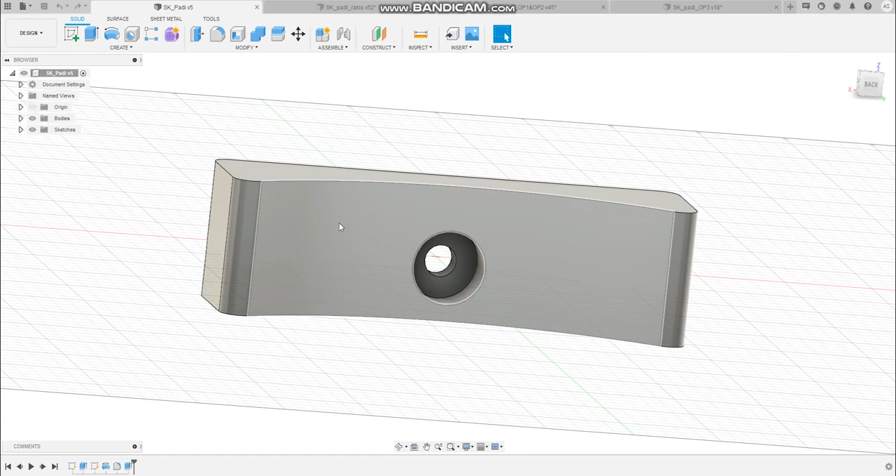In this video we will have a look how to create a program for CNC machining. First we will create machining program for fixture plate and then for the part itself. The part is this dumbbell base, made out of plastic.

The features that we need to machine are pockets and holes, and these holes must be tapped.

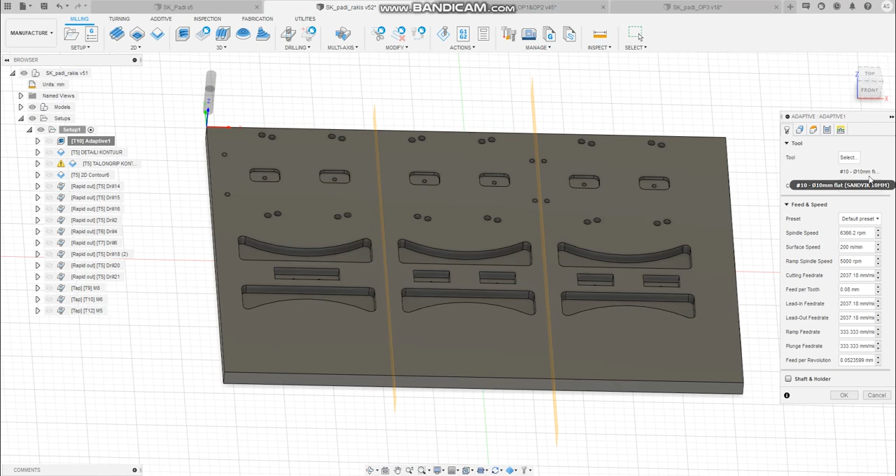First operation is pocket adaptive clearing. We use 3D adaptive clearing command for this, with a Sandvik 10 mm flat end mill. The geometry is pocket bottom. For optimal load we have 14%, which is 1.4 millimeters, and we use half a millimeter of stock in radial direction.

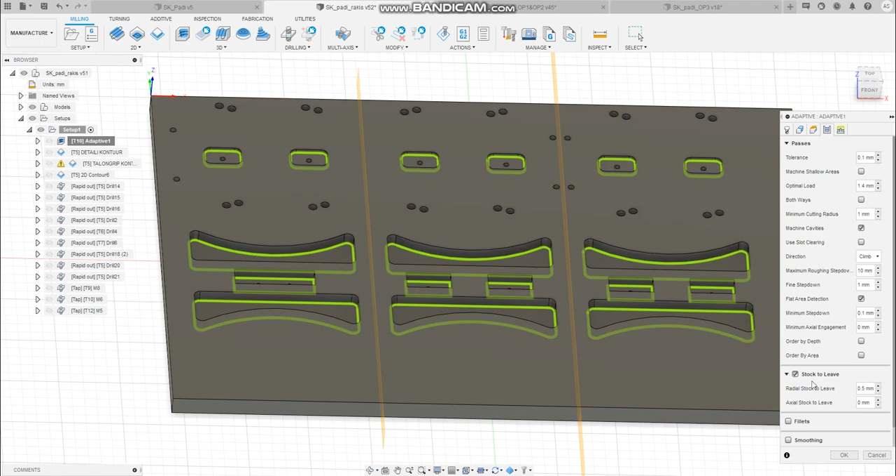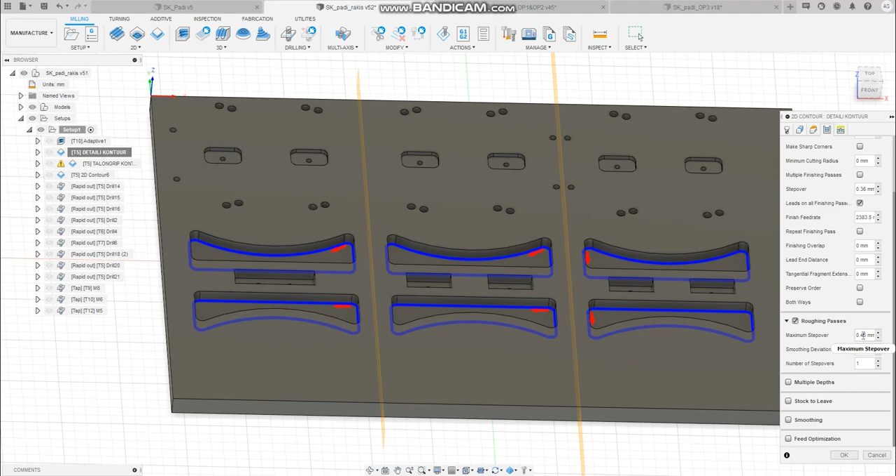Next we clean the detail pocket contour, using a Walter 6 mm flat end mill, selecting the bottom contours for this purpose. Here we have roughing passes made, so maximum step over is 0.45 millimeters. The reason is that during roughing process the 10 mm Sandvik tool leaves quite much material in these corners, and for the 6 mm tool this is a bit too much, so we use two passes to remove it.

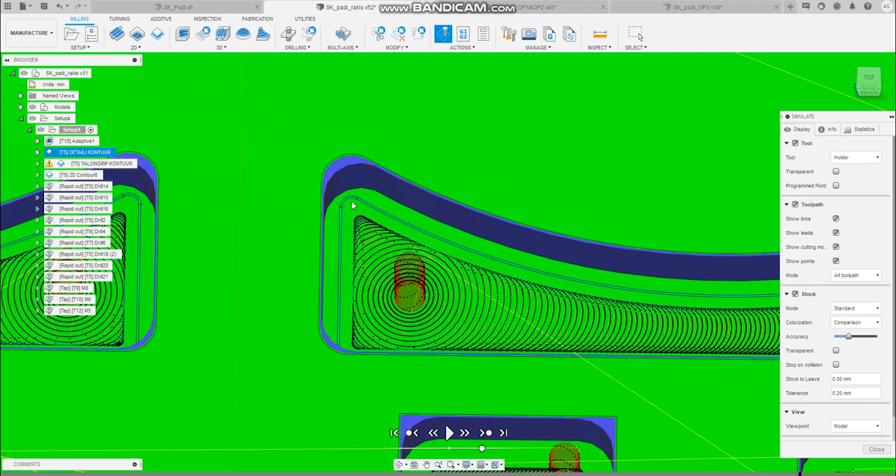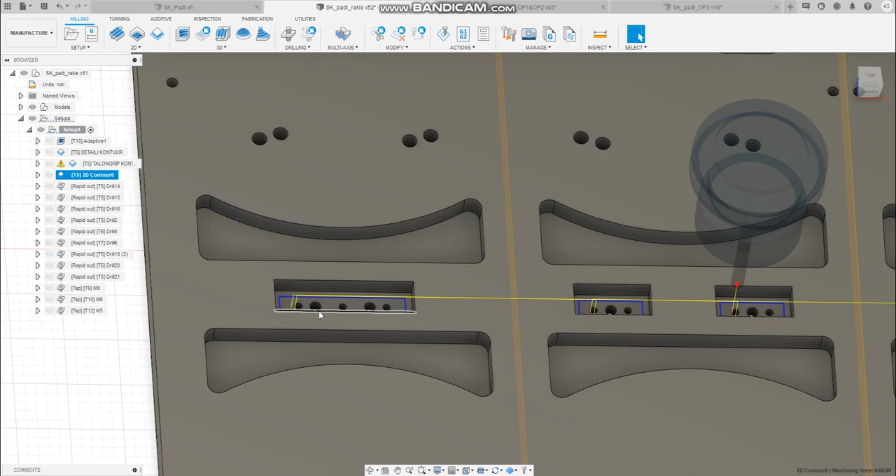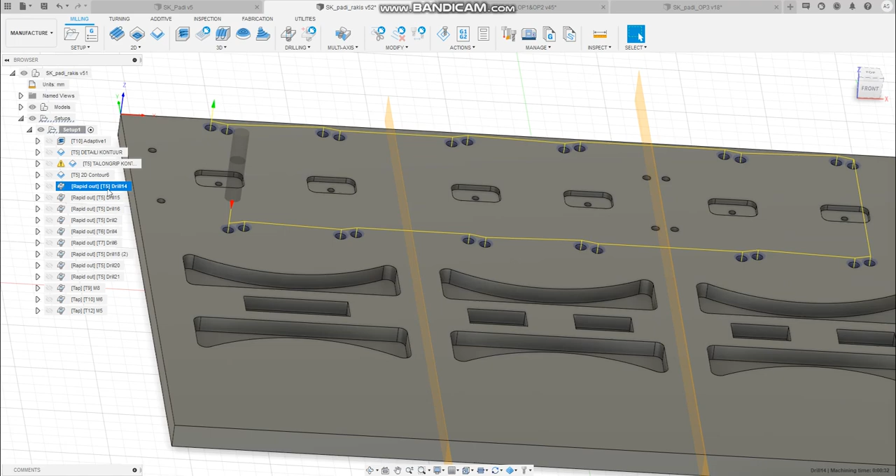Next we make a cleaning pass for our Talon Grip clamp pockets, and lastly for our Uniforce clamp pockets. Next we will drill all the pilot holes. For each diameter of holes we have our own path, because the depth of the drill is different.

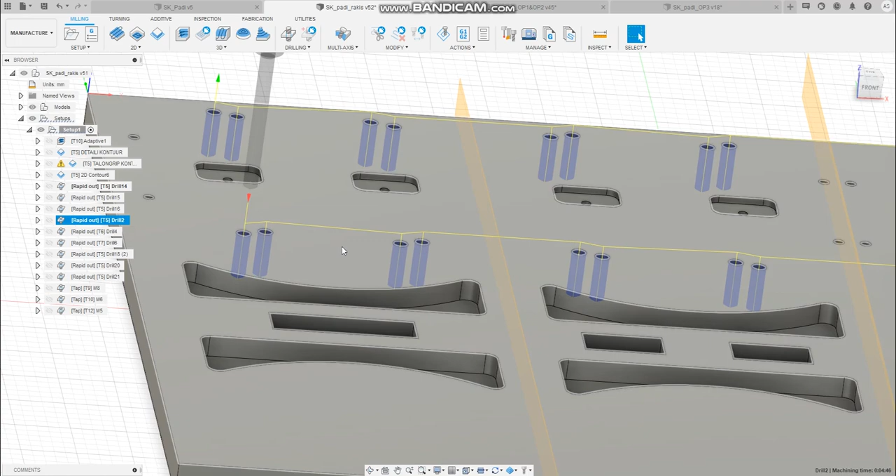For this we use a 10 mm spot drill with a tip angle of 90 degrees. After spot drilling we use the drilling command. We drill all of the holes and the drill goes through the material 5 millimeters, using high-speed steel drills.

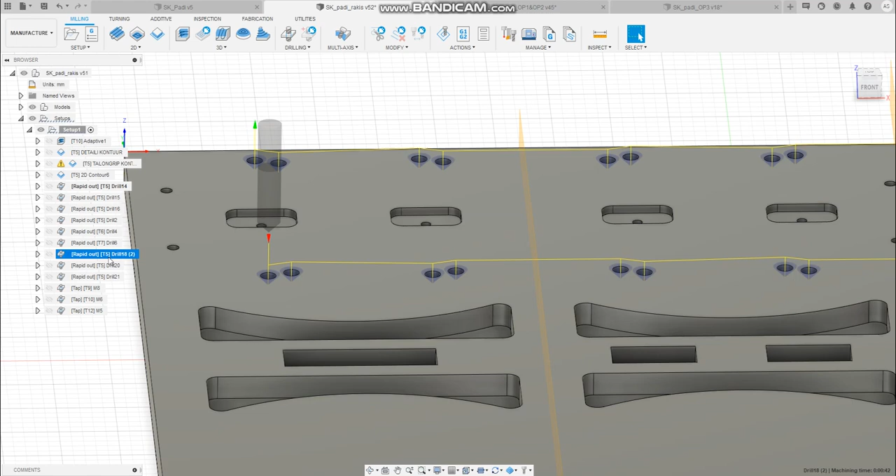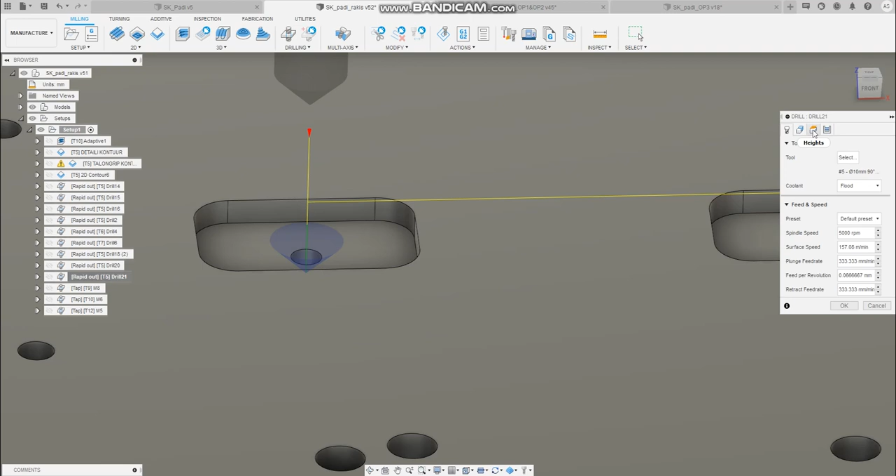Next we chamfer all the holes, and for each set of holes we use our own toolpath, because the chamfer is made using the drilling command. So if you want the chamfer diameter to be 5 millimeters, the tip must go through the hole 2.5 millimeters.

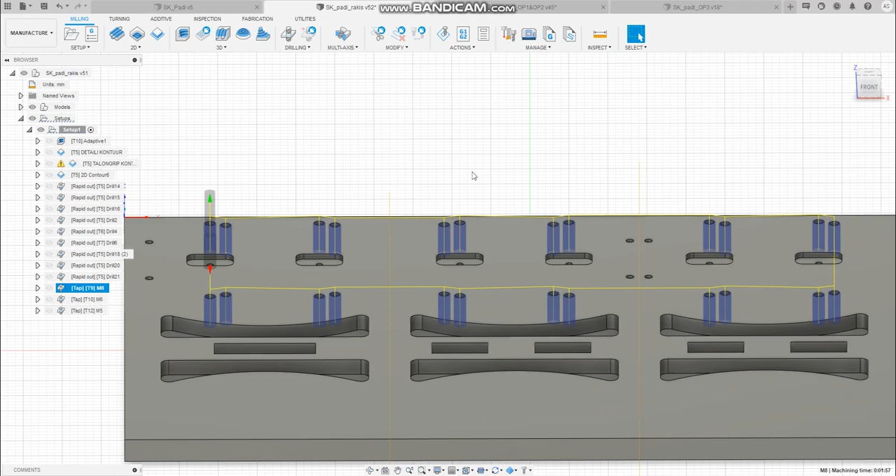And the last is the tapping command. The tap goes through the bottom also 5 millimeters, and during the machining process we have to use cutting fluid with taps. Now the program for fixture machining is ready.

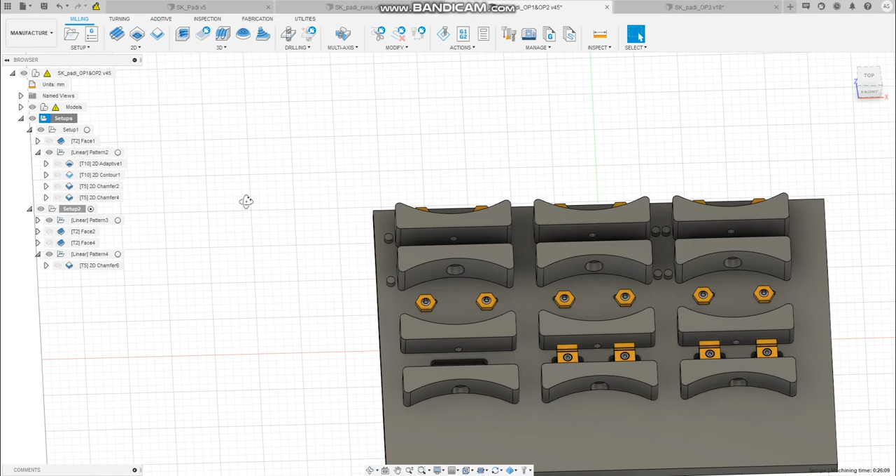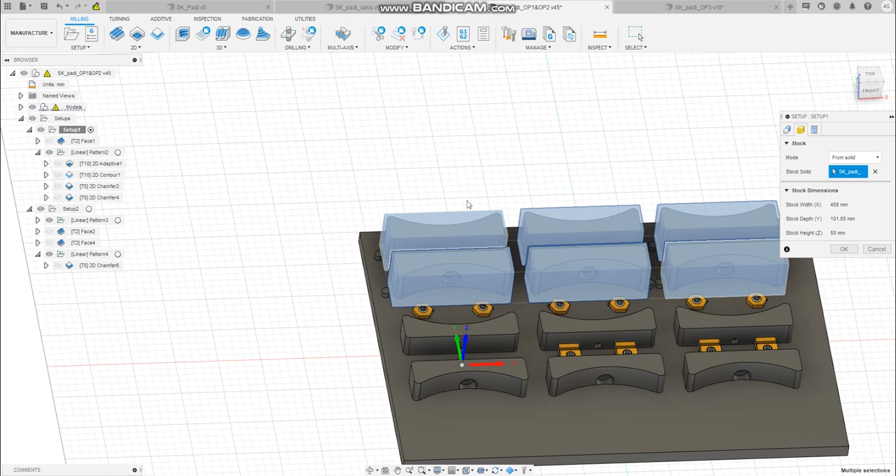Now we will look how to create a program for part machining. Here we can create machining for part first and second setup. The first setup is defined as follows: we have defined 6 bodies, 24 fixture bodies, and our stocks, which are selected from the solid models. The work zero point is placed in the center of this block and on the top of the plate.

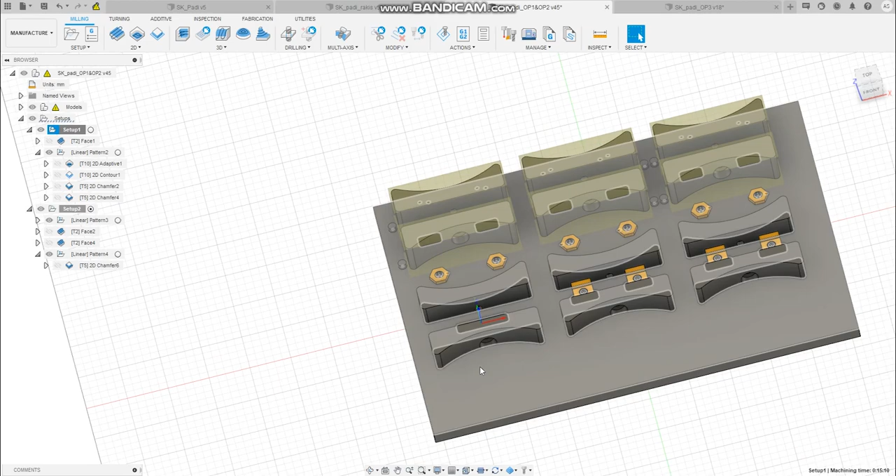So first we make our first setup, and we make a face milling operation. For this we use a 63mm Mitsubishi face mill, and we make only one pass with it.

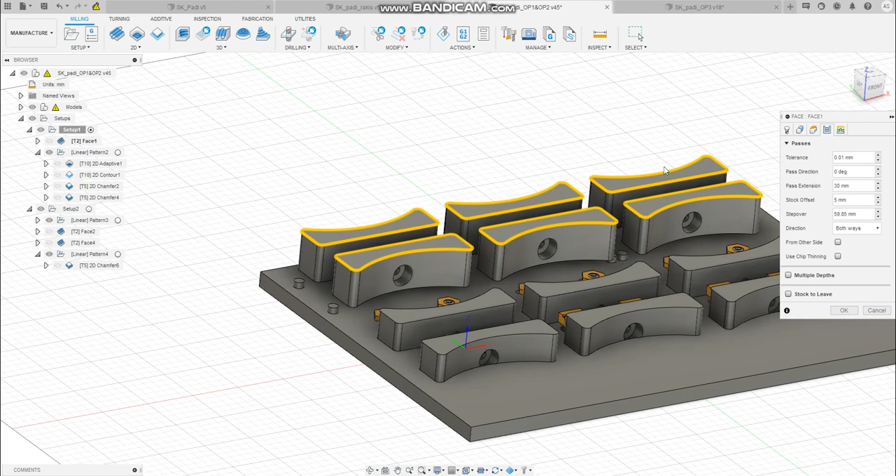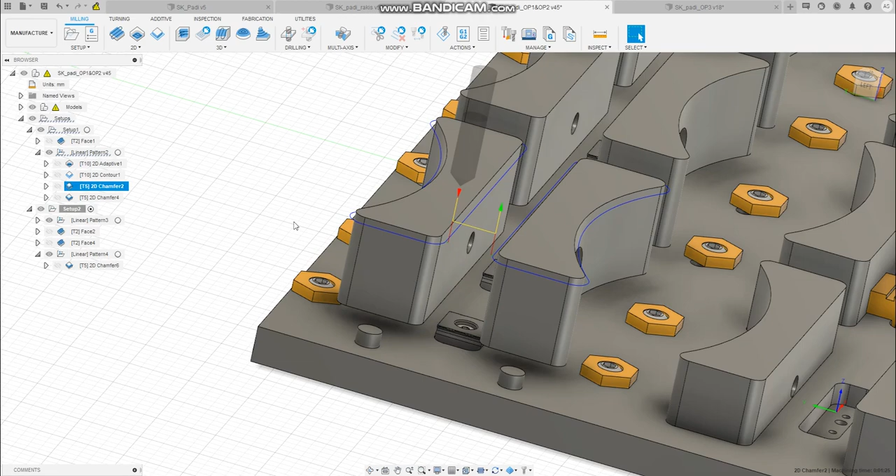Next we must machine the contour of the part. We use 2 depths since the tool flute length isn't sufficient to make it with one pass. Next we make the finishing pass, we chamfer the contour, and we create another bigger chamfer.

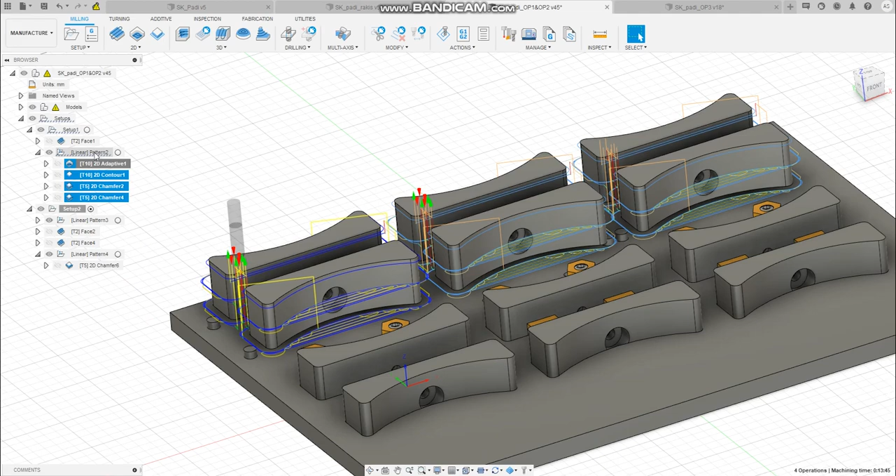To get these toolpaths to the other parts, we use the linear pattern command. We select all the toolpaths, right click and add new pattern, and a window pops up where we select our edge for direction, the spacing of 160mm, and number of instances of 3, with operation ordered by the tool. So the operations that use one tool are made on all the parts, and then the tool change is made.

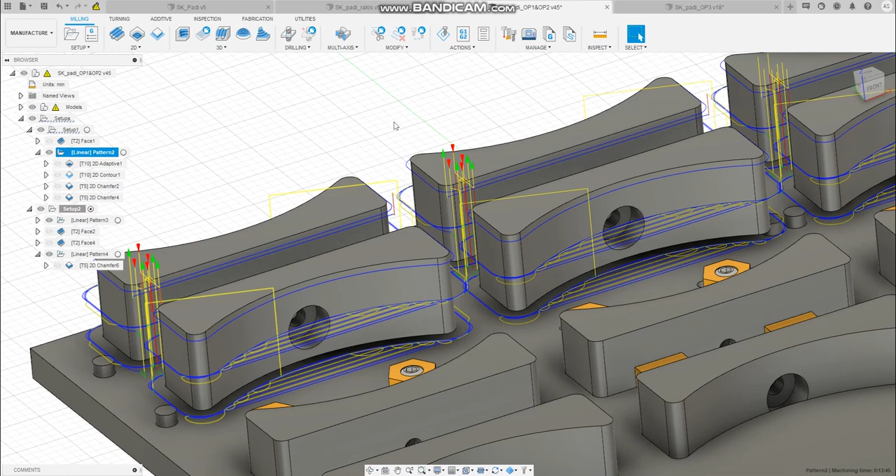Now first setup is ready. For second setup, the setup is defined similarly. We have our 6 model bodies, we have selected our fixture bodies, and the stock is a fixed size box.

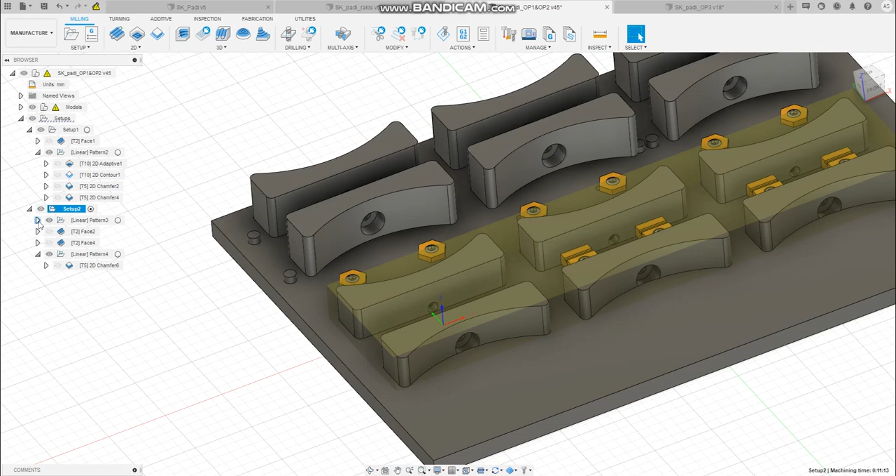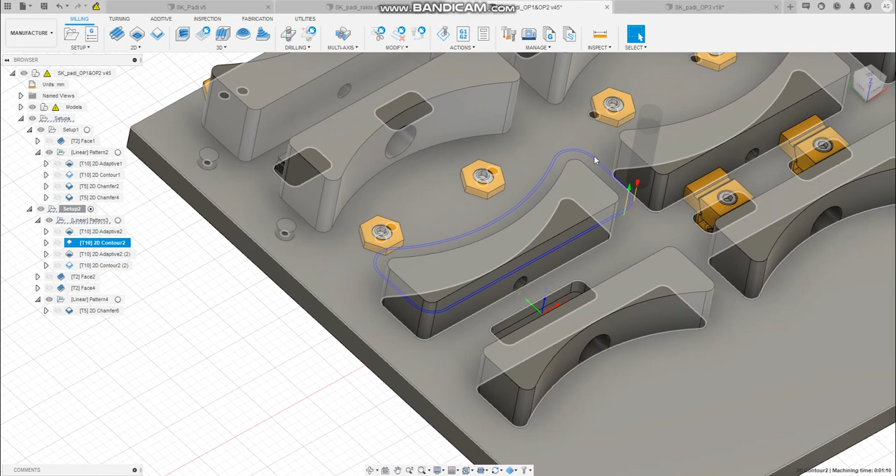So first, to avoid thin edges over the part in the face milling, we have to mill the contour first. For this we use the adaptive command, which removes material from the curved side, and then with the contour command we remove it from the other sides. The same is made with the other part as well.

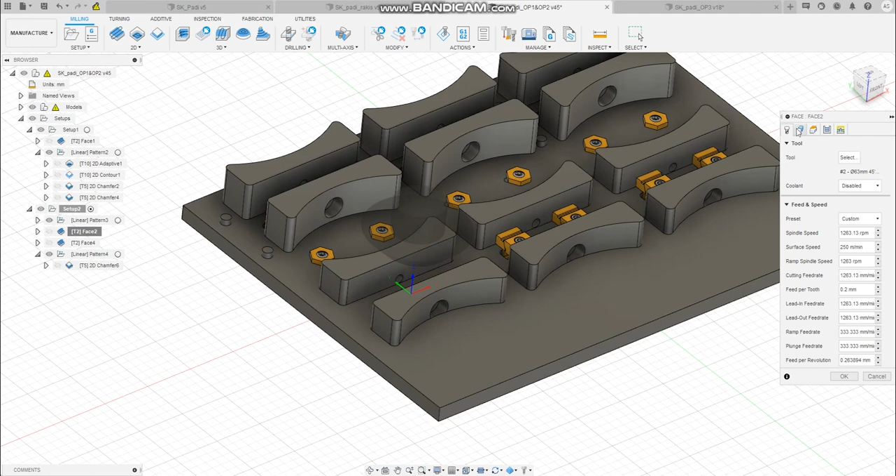Then we use linear pattern to transfer these toolpaths to the other parts, for both face milling and for the last operation, chamfering, selecting all the bodies each time. So we have our programs for first and second setup.

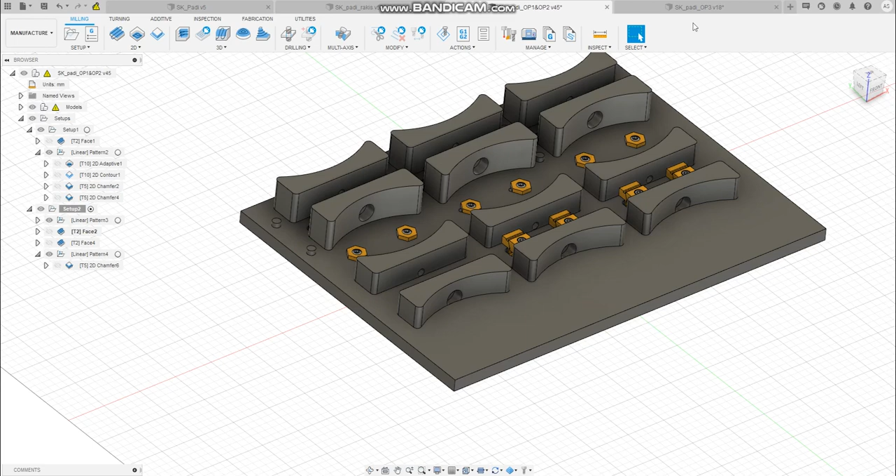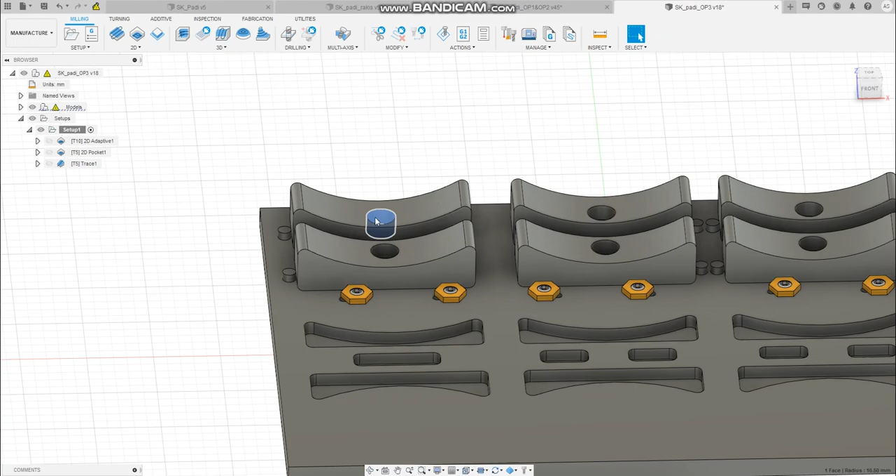For third setup we have another design. In third setup we need to mill the pocket and a hole. For the pocket we use the adaptive clearing command, and we just choose all of the pockets, because here we can't use the linear command since the spacing isn't even.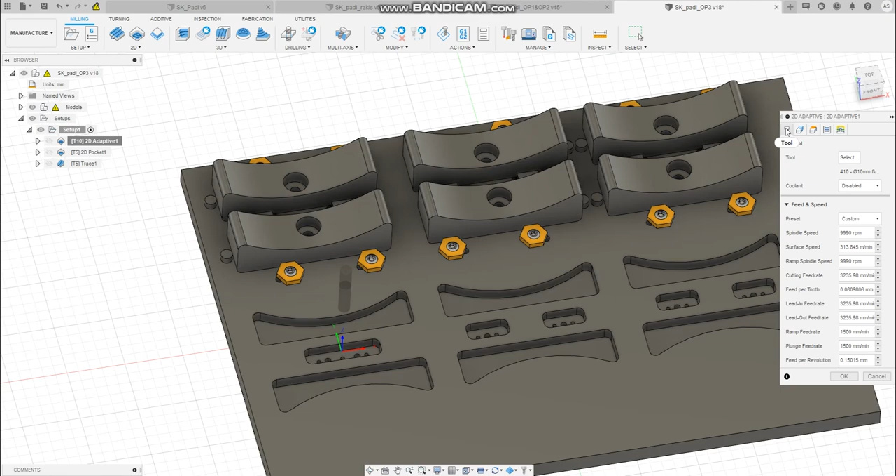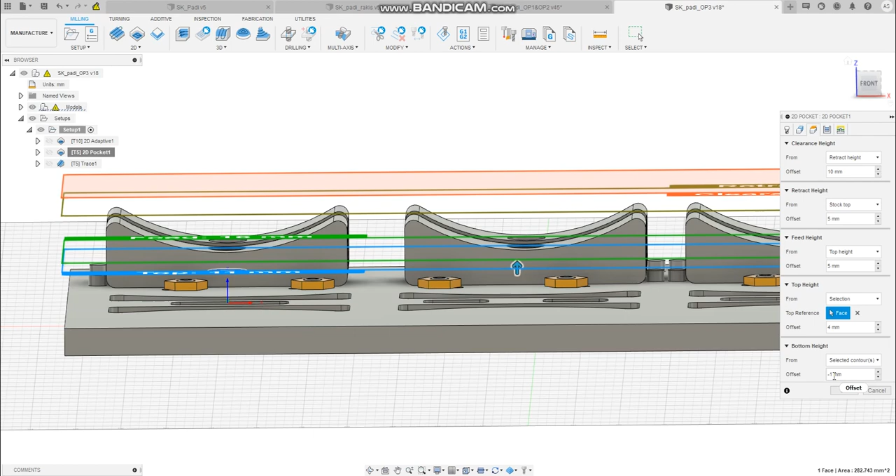For this we use a 10mm Sandvik flat end mill. For the hole we also select all the geometries, and for this we use a 6mm Walter flat end mill, and it goes 1mm through the part into the fixture body. Last we make a chamfer for this contour. For the chamfer we use the trace command because this is a 3-dimensional chamfer, and it cannot be made with the 2D chamfer command.

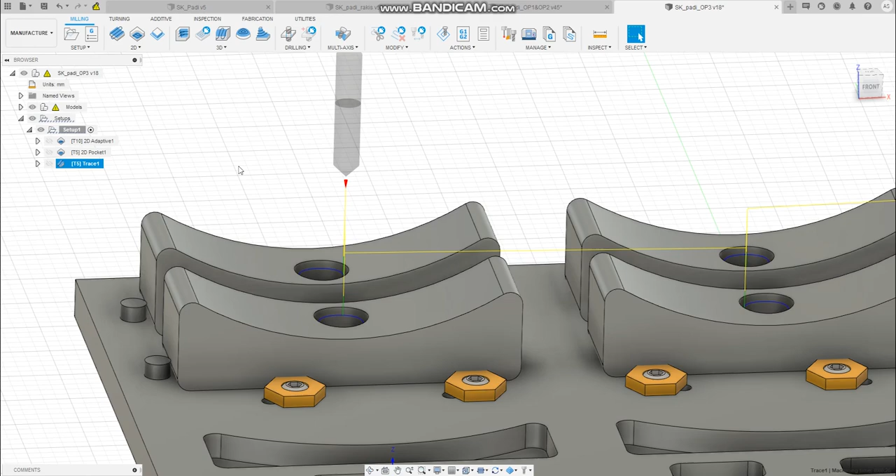And now we have the program for third setup and for all of the part itself.